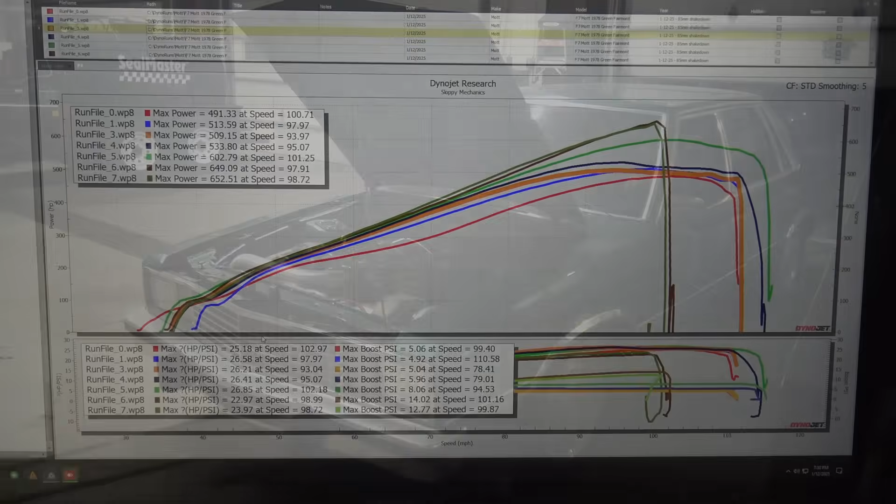So here is the Fairmont as it was the other day, ready to go to the dyno, all cleaned up, everything hooked up and mostly functioning. And today I go to take this guy to the dyno, and I repinned it.

Anyway, I just drove it home because it's so cold today that it had no problem cooling off. So I drove it home, fixed the pin out, and then drove it down to the dyno, issue free, finally, and started throwing down this. So this whole voiceover, I'll show how the engine bay looks. Okay, now we're going to talk over how the dyno plots went.

I was extremely happy, I did not push it very hard, and it made 508 on 5 pounds. I was extremely happy about that. And then took a little hits there to get the boost controller working, figure out the baseline duty cycle, and when I wanted to overshoot a tiny, I made 8 pounds, and then 8 made 602, and then what happened after that was that's when the fuel pressure issue was happening.

I have safeties built into the computer where if injector duty cycle goes too high or fuel pressure goes too low, closed loop gets overactive. So I have all of that set up, and then this dipped below the fuel pressure safety, so it nicked it off. It did it twice, so I was like, well, I gotta quit. And I looked at the data log and I was like, wow, my fuel pressure is falling off hard. So I figured that was the end of the day. It probably would go 650 plus easily on just 12 pounds, looking at how it was before it cut off.

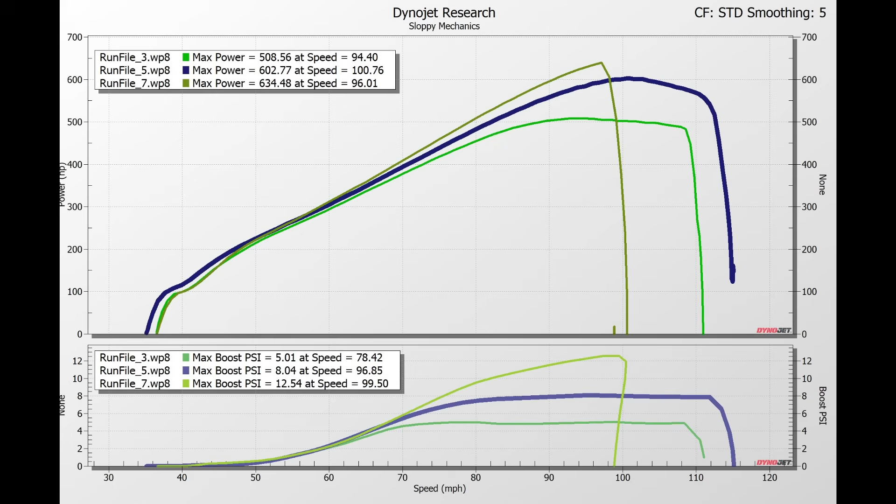Other than that, I'm extremely happy, super happy with this thing so far. And next time I go, there's something wrong with my fuel pump, I'll do an update video. Either I only have one working, or one went bad, or the way I was triggering it isn't set up - any number of things. So I'm going to fix the second pump, go back with ethanol, and do the same amounts of boost, and then shoot for more as long as I don't have a fuel issue.

Quick going over the data here. What I wanted to see was turbo outlet pressure, but the sensor isn't working - I don't know why, I have to check it out. And back pressure, I don't have the canister, it should be here tomorrow. I figured back pressure would be very good anyway, so not too worried about it.

One of the neat things having all of this sensor data is you can see turbo outlet temperature, ambient temp, and what's going into the intake. You can tell how well the intercooler is working, you can tell if the turbo's just out of breath and blowing hot air like crazy, and the outside temperature to know how much it's getting in, getting out, everything else.

The one I love to use now is coolant pressure. In my experience, with a stock head, stock block junkyard engine, it's usually 13 to 15. I usually set a cut - you can dyno pull it a bunch, and if it has a consistent close to 20, just set it at 30. But I always like to set it so, say if it's always 15, 13, I try to cut it at 20. You shouldn't have that much wiggle that it's nicking 20, because if it is, it's pushing combustion anyway.

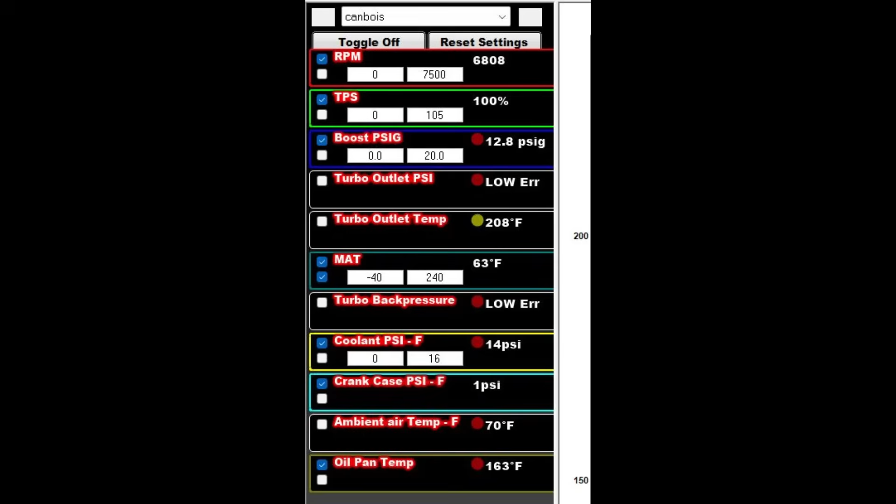So even after all that, the data looks pretty cool, I'm super excited how it's going. I got to dig into these sensors, but everything looks good, and it survived - I drove it there and drove it home. So this is just instead of the numbers, this shows the view, and you can see how everything's correlating on the other side here. At the tip of the red, that's the RPM, and you can see it was on its way up and something cut it off, just boop.

So it has very good numbers. The coolant pressure is great, it's right in where I normally see. Crankcase pressure is almost non-existent, and outlet temperatures and everything are looking pretty good. So I'm excited to get some ethanol in it and take it back down.

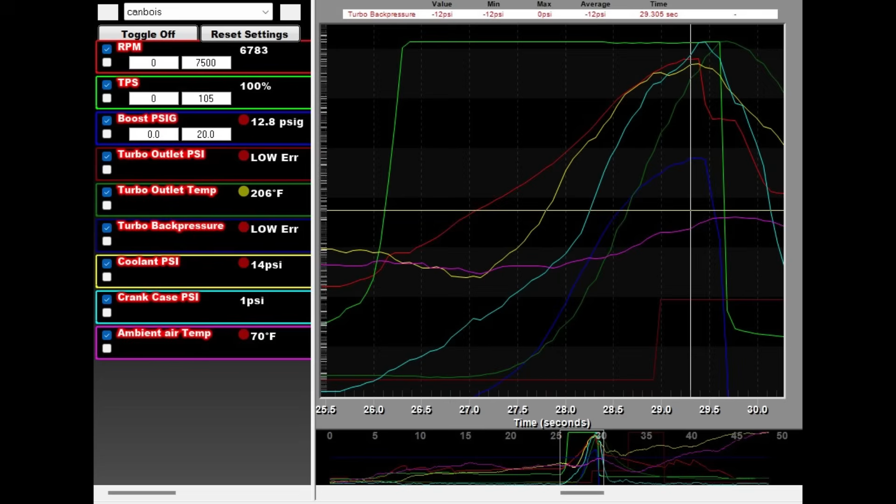I got to figure out my fuel stuff going on, which I don't think is - I think that one pump isn't turning on at all. I don't think I have it connected, or I have the trigger done incorrectly. I'm pretty sure the person is me, because that's who it's been the last couple days.